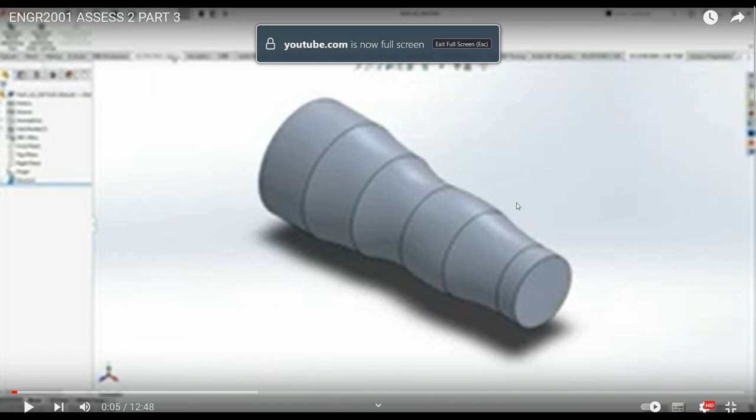Okay, recording this in place of the original recording that did not record any audio, and this doesn't look very clear. I'm afraid this is the best I can do. I'll attach both links in the assignment.

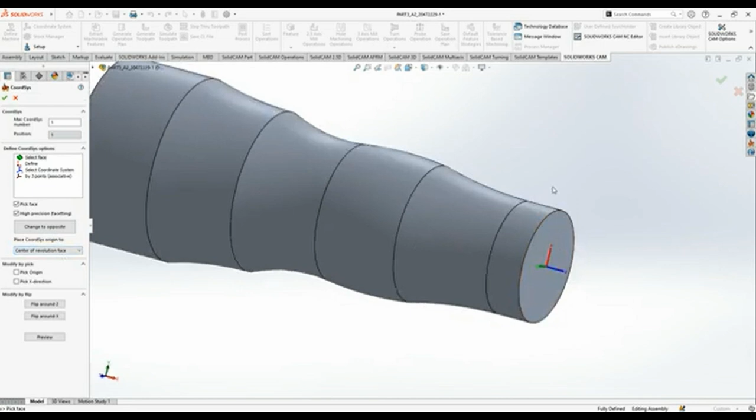So here we are with our piece of turned material. I've already entered into SolidCAM part and selected new turning operation. We've selected internal and metric options. I think I just selected the machine, and now we're looking at the coordinate system. So as you can see, I've selected the end of the piece with center of rotation, revolution face being the option selected. So we've got positive Z out from the object and positive X kind of in a vertical position.

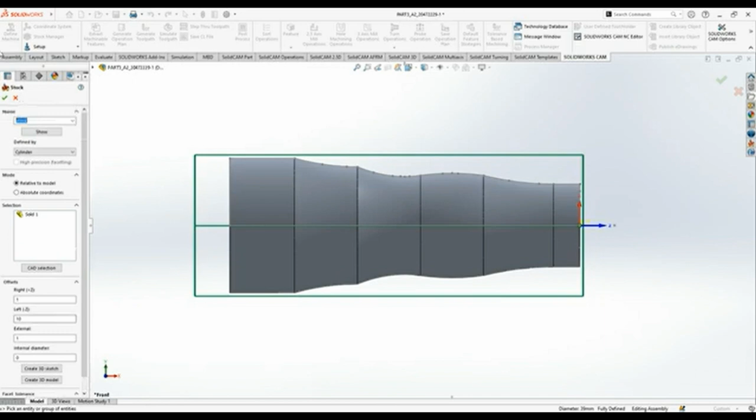So now we've done that, SolidWorks is parsing the model. This can take a moment. And now I'm about to define the stock dimensions of the piece that we are machining down into this shape. So as you can see on the left, we have extra material to provide room for the clamp. And on the front end also, there's just a little bit of excess material that will be face milled off, as well as around the curves of the body. So by selecting that, we've defined the stock.

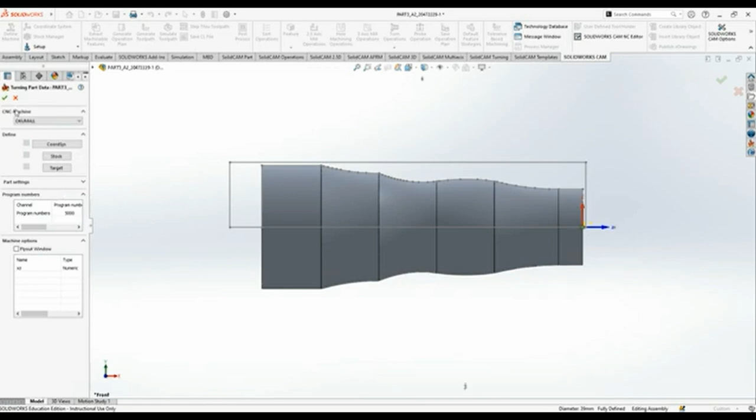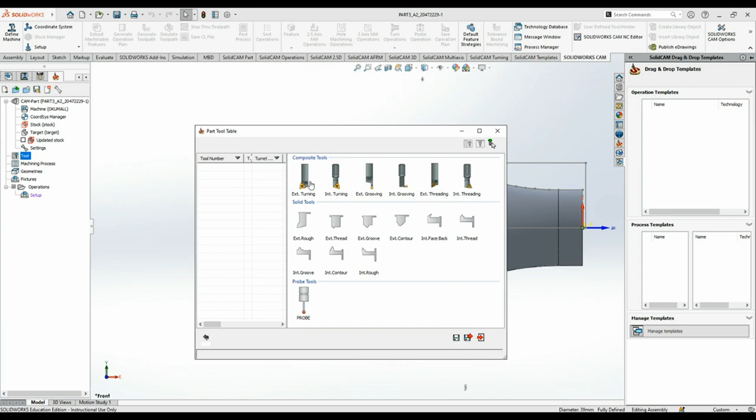From here, that's just the target. It's kind of already preset to what we want, so nothing needs to change. Selecting OK from there. And now from here, as you can see as well, the machine has been set to something I can't quite read, but it's the preset option, and it's the one we want. So now defining our tool, we only need one tool for this operation, and I'm going to add an external turning tool.

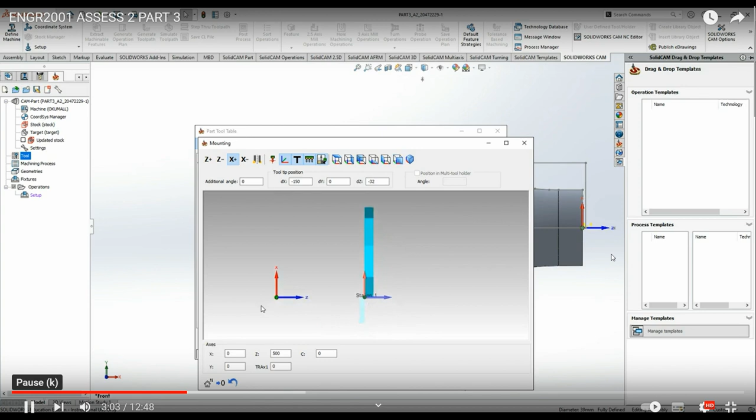The clarity has improved, thankfully. So now we're looking at the mounting of the tool, and as you can see, it is not mounted the way we would like. So by clicking the X positive, it's now inverted the tool to face forward, the cutting edge to face forward, I should say, and that's what we want. So we close this window, we move on from mounting, save and exit.

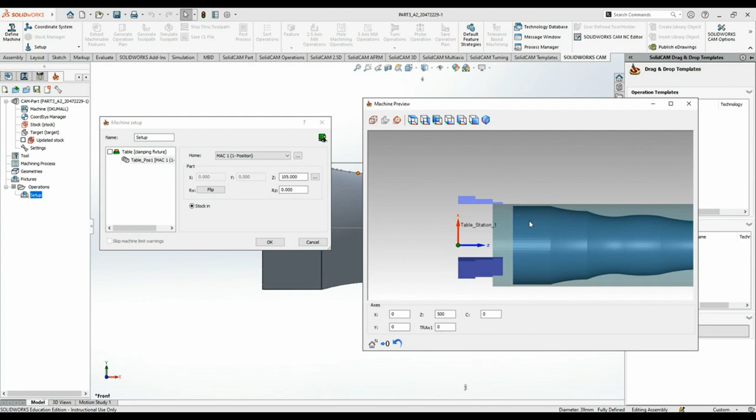Now entering into setup, we're going to define the position of the part on the table while it's being milled. So here we have a preview, and zooming in, we can see that the wrong end of the piece is being clamped here. So we're going to adjust that setting on the Z axis to place the part backward so it's gripping excess material here. So the dark green area is the piece we want, and the light shaded green is our stock. So it's only gripping stock. That means our cutting tool won't ever clash with that.

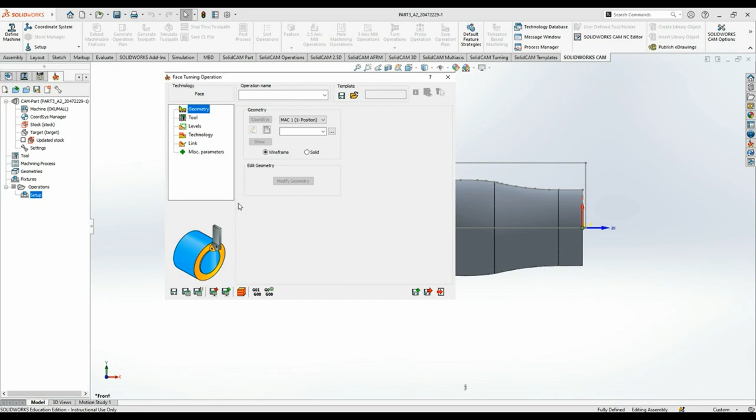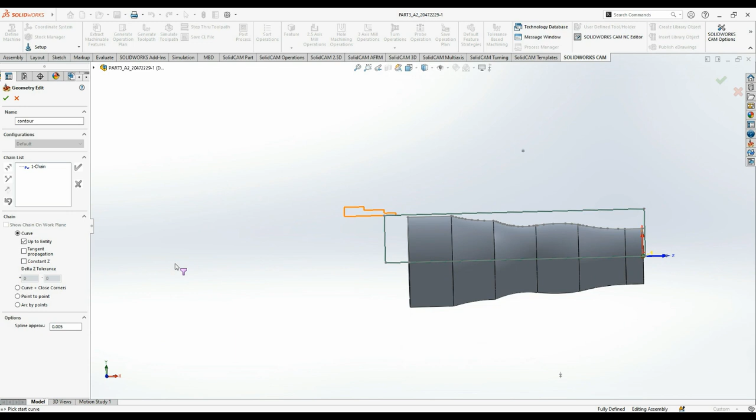Now from here is where I would be adding the milling processes. And for this, first we have the face turning component where we're going to remove that 1 mil of material from the front. So here we select new on the geometry tab, and we define that by using a line from our sketch that this is the geometry we are concerned with, and that just means the cutting will be focused from the origin up to that, along that Z axis. And it has been entered into our chain list, and we select OK. Now we move on to our tool selection.

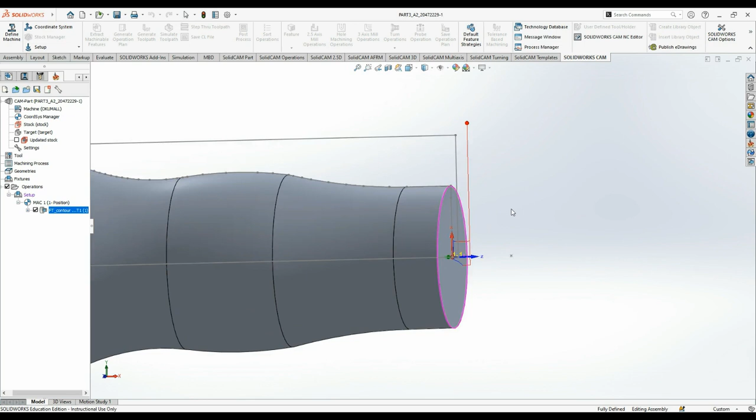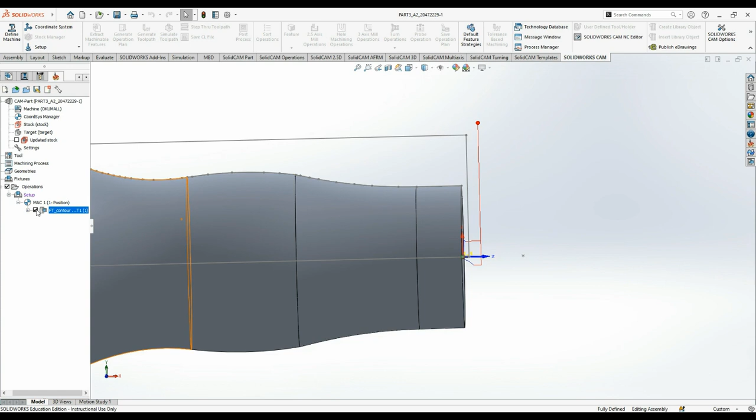That's our tool. We've selected it there. I don't believe we need anything in levels here, so just technology. And we'll be choosing the stairs setting here. There's no curvature to these cuts. And now we're going to preview the path of the tool, and it completed the cut in one pass, that's all. It's a very simple operation there. Just playing it there in the simulation. Now we'll be adding our next. It toggles the toolpath on and off by unchecking that box.

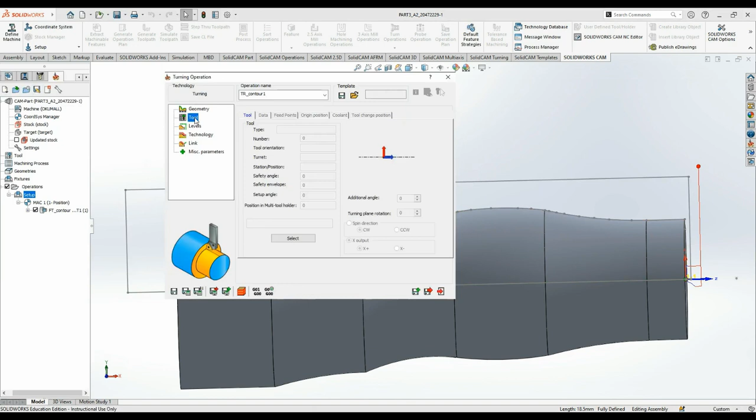Anyway, so now we'll move on and add another turning process. This is a proper turning process. Selecting new again to define our geometry. And by selecting the first and last edge on the X value there, that just grabs everything in the middle and creates a chain for our chain list. We OK, and move on to tool, selecting that tool that we defined earlier, and straight on to technology. Again, checking levels, but it was all fine. And for our work type, we'll be going with rough, as it's just our first pass. And previewing the path of the tool there. Here is the actual simulation. Speeding it up.

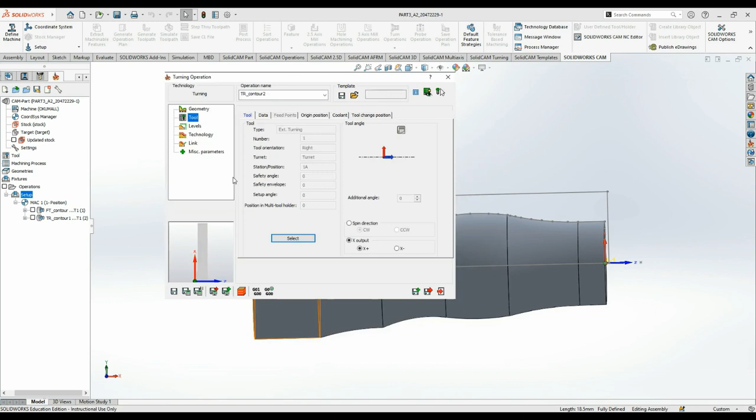Now for the third and final turning phase, it's our finishing, where we'll actually get the smooth contours of the shape we're after. So geometry, define a new, and again we'll select. I think I end up with an issue here. No, got it. Picking the tool. I think this is what happened. I saved it before I completed all the options, and I'll end up deleting it and restarting, which is probably a bit inefficient, but it's what I did. And this just crashed so many times, it was necessary to keep running forward with this. I was happy that it worked, so I had to keep bungling through.

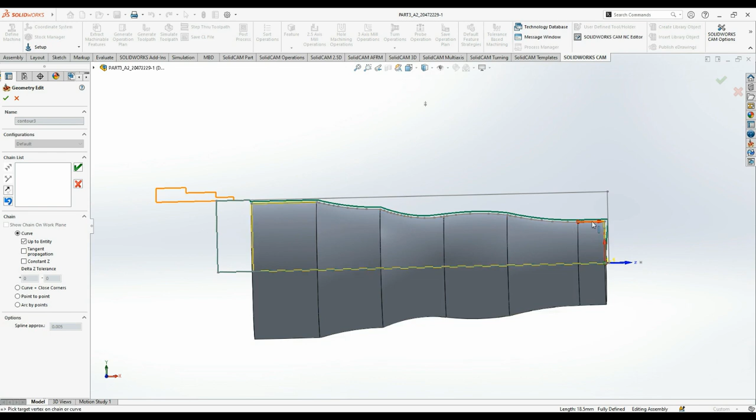That is why I'm also just reusing this recording that had no audio and redoing it at home now, because see, this is where I have an issue, and I must have selected the wrong part of the piece, but I figure it out. There you go. Delete that. Start again with this edge here and this edge there. And it's done it again. So probably close this out, I think, and get a new contour. Select that edge. Did it again. Okay, close this one more time.

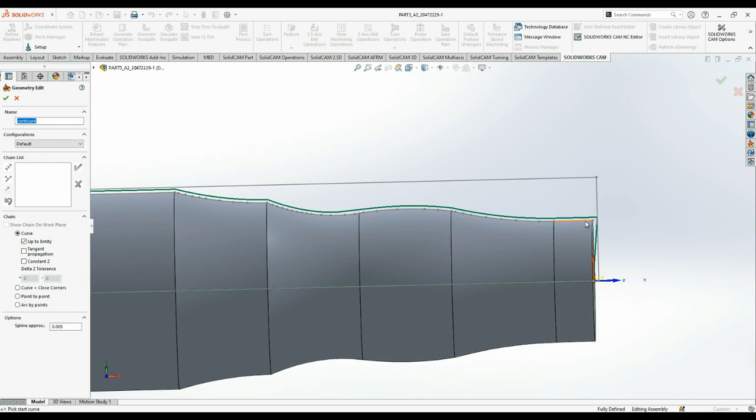No, I went through with it. I was concerned about that line that ran through the center being highlighted, but I think I might even delete that. Yep, I deleted it again. And if I remember right, this time it works. Nice, careful clicks. And there we go. That's what I wanted. So I've added that to my chain. Add the tool. Technology. Finish. Save and exit. And calculate it. You don't see the menu pop up, but I right click and go to calculate.

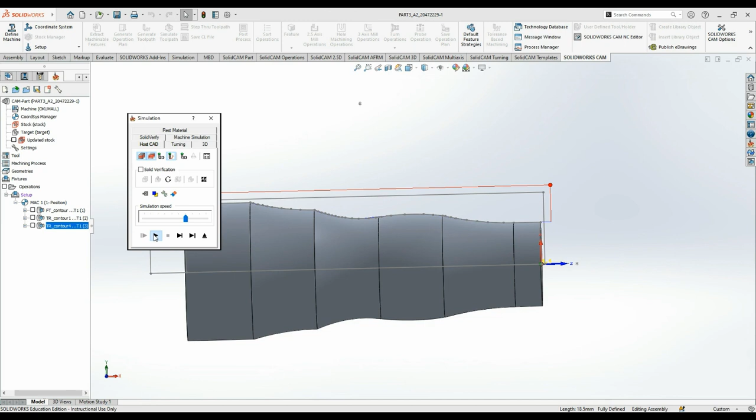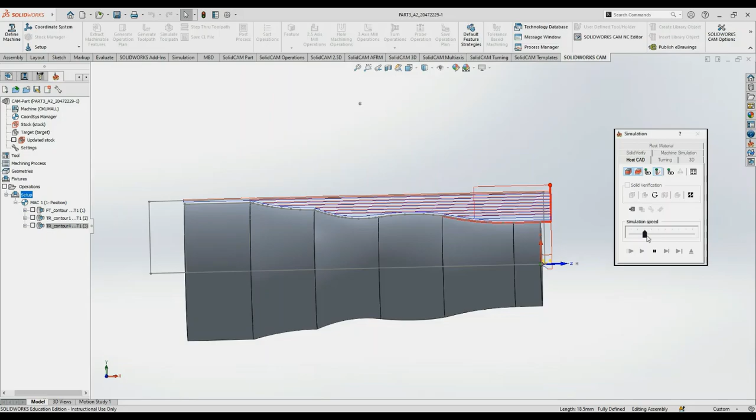And then simulation. I'm selecting a 3D simulation. It's very quick. It's very hard to spot, so I'll slow it right down now and play it again. And this time it's a lot clearer that the tool has run along those contours. Now just selecting all of them. They're all visible at once, and calculate them all. And then simulate all at once. There we go. Yep.

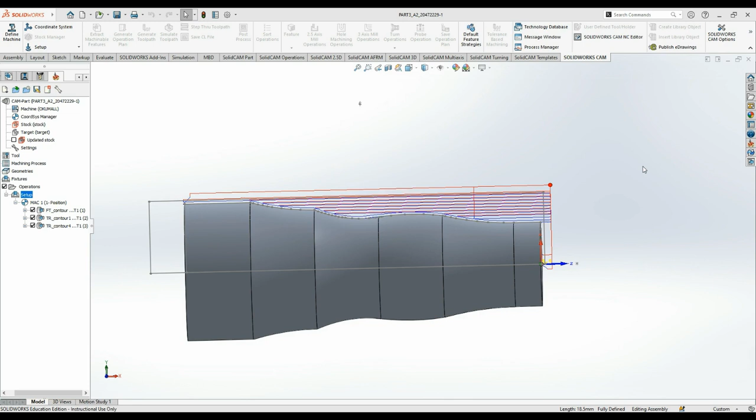And from here, just generating the G code, and I didn't realize that it wasn't visible to what was being recorded, but I'll include a screenshot in the report. And that's pretty much it.